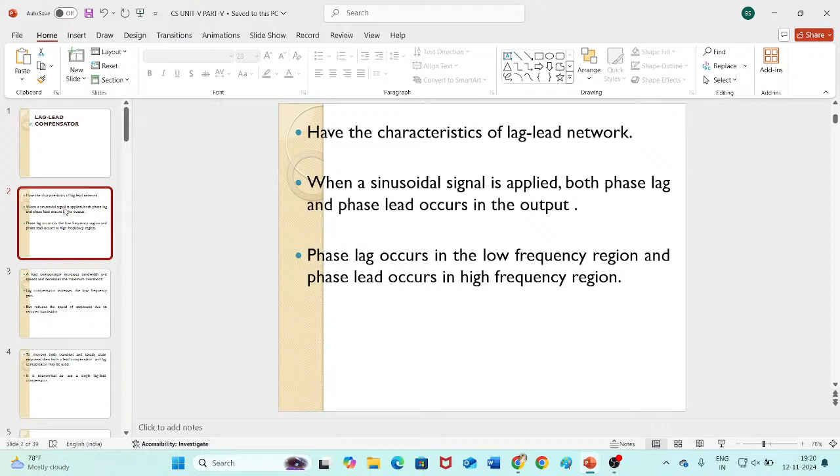In a lag lead network, when a sinusoidal signal is applied as input, both phase lag as well as phase lead occur in the output, but at different frequency regions. So in a lag lead network, if you give a sinusoidal supply, both phase lag and phase lead will occur in the output at different frequency regions. Phase lag occurs usually at low frequency region, and phase lead occurs at high frequency region.

The phase angles will vary from lag to lead as frequency is increasing from 0 to infinity. Why? Because phase lag is occurring at low frequency region and phase lead is occurring at high frequency region. Therefore, phase angle omega will vary from lag to lead as frequency is increased from 0 to infinity.

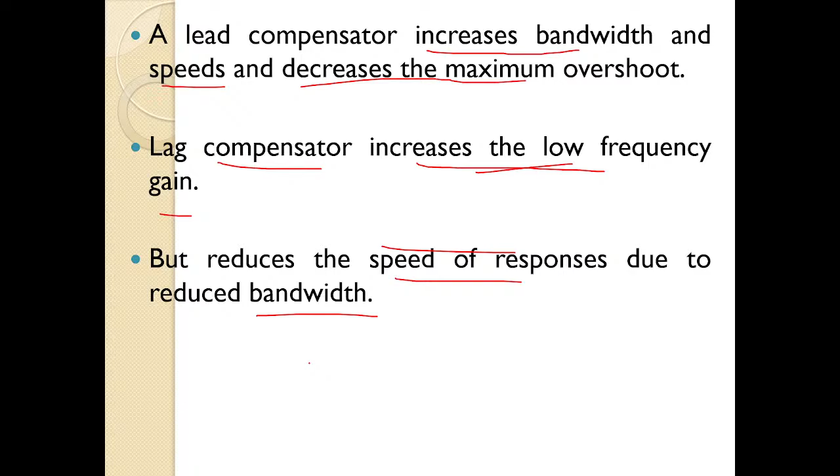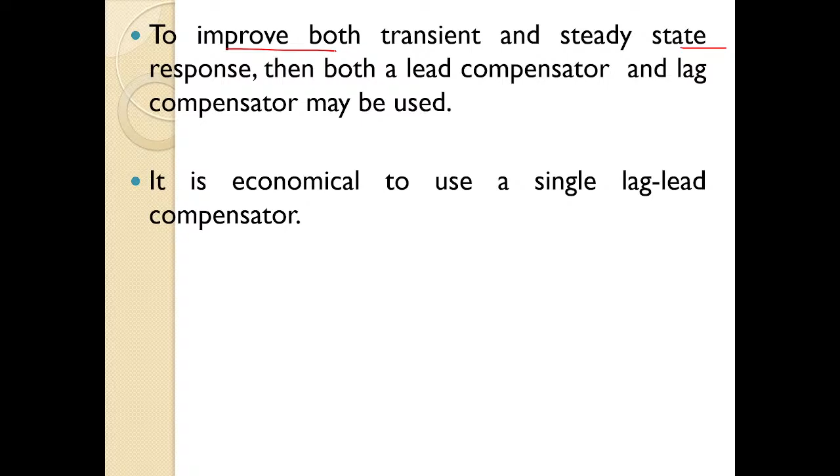Now, if you want to improve both transient as well as steady state response, then we need both lead compensator as well as lag compensator. So to improve the transient response as well as steady state response, we require both lead compensator as well as lag compensator simultaneously.

Since we require both lead compensator and lag compensator simultaneously, instead of using them separately, we can combine those two together to form a compensator which is known as lag lead compensator. Because of these advantages of lag compensator and lead compensator, they are combined together and operated as a single compensator.

In order to combine their characteristics, both the transient response as well as steady state response will increase when we are using both lag compensator and lead compensator. So instead of using separate lag compensator and lead compensator, we can use a single compensator known as lag lead compensator, which has all the advantages of both lag and lead compensators.

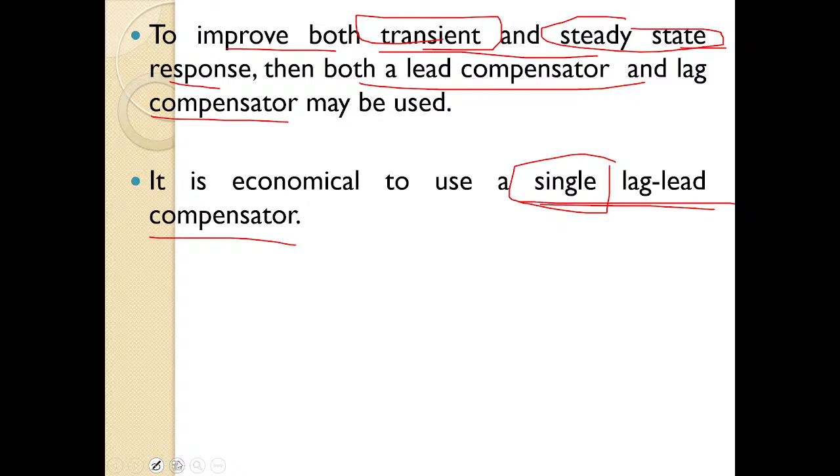Now, let us see the S-plane representation of lag lead compensator.

This lag lead compensator possesses two poles and two zeros such that compensation will increase the order of the system by two. When you provide compensation to any system, the order of the system will increase by two, unless the poles and zeros cancel each other. If they cancel, then the order will not increase by two. But if they are not cancelling, since the compensator has two poles and two zeros, the order of the system will increase by two.

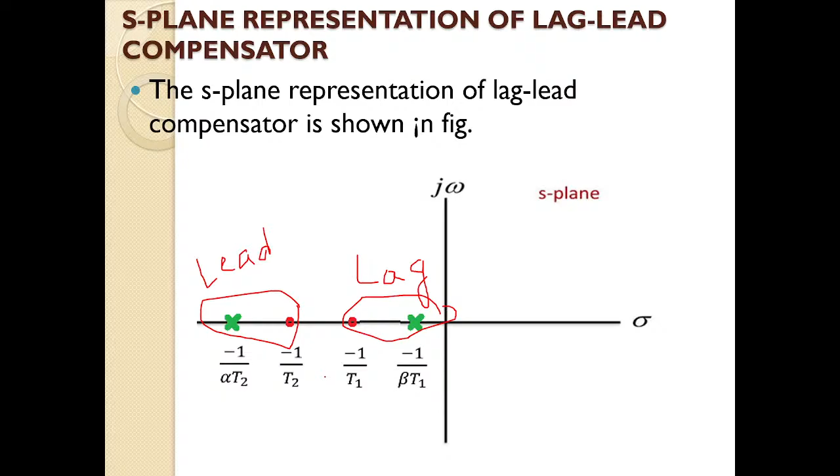So the transfer function of lag lead compensator is given by GC of S equals S plus 1 by T1 into S plus 1 by T2, divided by S plus 1 by beta T1 into S plus 1 by alpha T2, where beta is greater than 1 and alpha lies between 0 and 1. This is the transfer function of the lag lead compensator, which has two poles and two zeros on the LHS side of your S plane.

So let us realize this lag lead compensator. Next, realization of lag lead compensator using the electrical method. So let us realize this lag lead compensator using the electrical network.

So you can see here, it is an RC network. Input is EI of S and output is E naught of S. On the series branch, there is a parallel combination of R1 and C1 capacitor, and on the parallel branch, these two elements R2 and 1 by SC2 are connected in series.

So we have written these capacitance values in Laplace form. Input and output, as well as current, is also in Laplace form. So this is a Laplace circuit. To this circuit, if we apply voltage division rule...

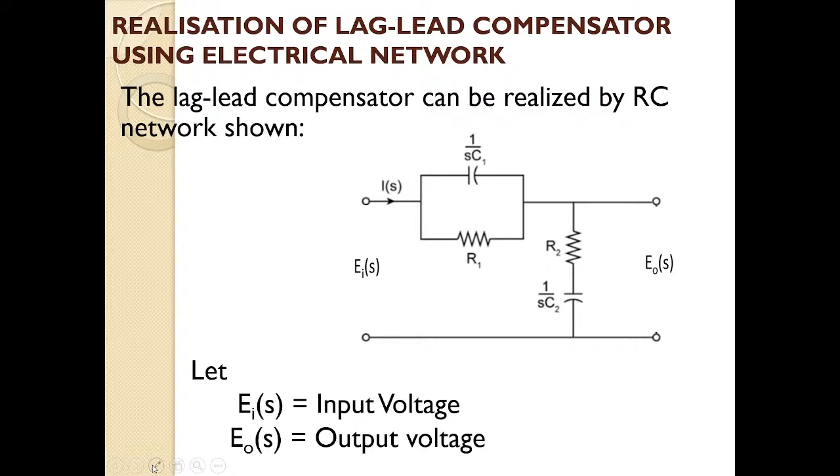What is our output voltage? Output voltage is equal to input voltage into the self impedance, by opposite impedance plus self impedance. That is the voltage division rule formula.

So let us see. What is our output voltage? That is the input voltage equal to R2 plus 1 by SC2, divided by R1 parallel with 1 by SC1, plus R2 plus 1 by SC2. R2 and 1 by SC2 are connected in series, and R1 and 1 by SC1 are connected in parallel.

So just simplify it, you will get E naught of S by EI of S equal to S into R2 C2 plus 1 by SC2, divided by R1 into 1 by SC1 by R1 plus 1 by SC1, plus S into R2 C2 plus 1 by SC2. This is a very familiar voltage division rule, simple circuit.

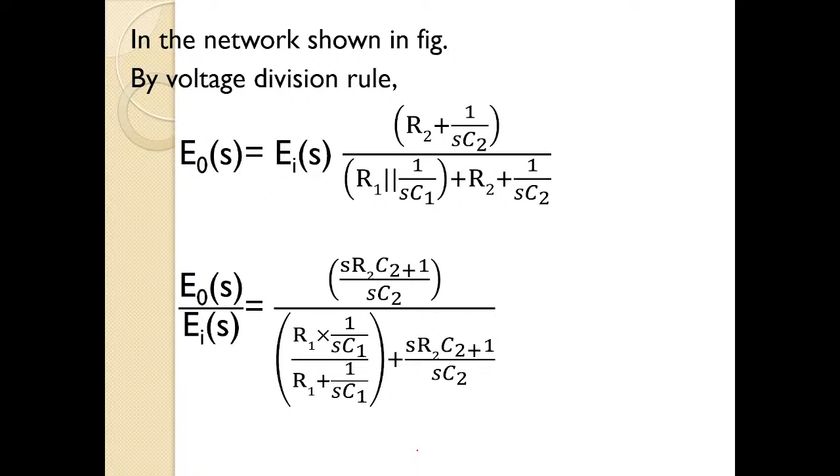RC circuit is there, so simply you have to write the equations, which you can easily write down. It's very easy to write. Simple circuit, nothing complicated. So just rearrange the terms.

If we rearrange the terms, you will get E naught of S by EI of S is equal to SR2C2 plus 1 by SC2, all divided by R1 by SR1C1 plus 1, plus SR2C2 plus 1 by SC2.

Just take the common denominator in the denominator term. If we take the common denominator of this term, you get E naught of S by EI of S equals SR2C2 plus 1 by SC2, divided by SR1C2 plus SR1C1 plus 1 into SR2C2 plus 1, all divided by SR1C1 plus 1 times SC2.

So send this denominator to the numerator term, just rearrange the terms, you will get E naught of S by EI of S equals SR1C1 plus 1 into SR2C2 plus 1, by SR1C2 plus SR1C1 plus 1 into SR2C2 plus 1.

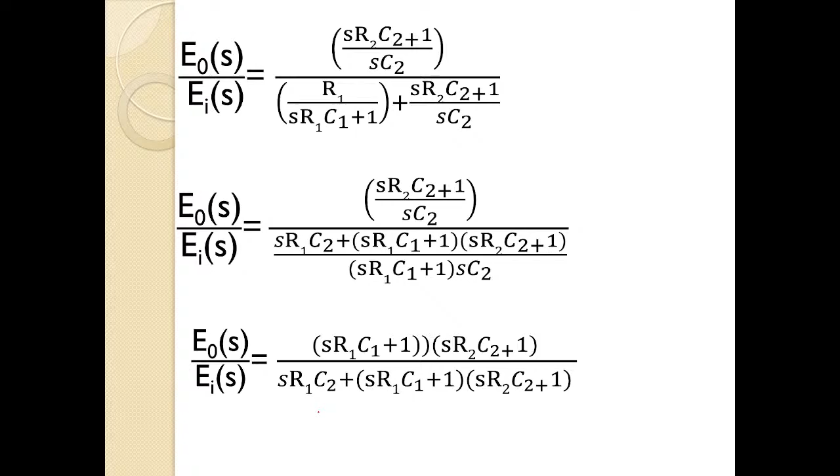I'm simply reading the equations. Being an engineer, you know how to simplify these terms and how to rearrange them. It's simple. So once again, if I rearrange the terms, if I take some terms common, what do I get?

R1C1R2C2 into S plus 1 by R1C1, into S plus 1 by R2C2, by SR1C2 plus R1C1R2C2 into S plus 1 by R1C1, into S plus 1 by R2C2. Now, on dividing the numerator and denominator by R1C1R2C2, you will get...

E naught of S by E i of S is equal to S plus 1 by R1C1 into S plus 1 by R2C2, all divided by S by R2C1 plus S plus 1 by R1C1 into S plus 1 by R2C2.

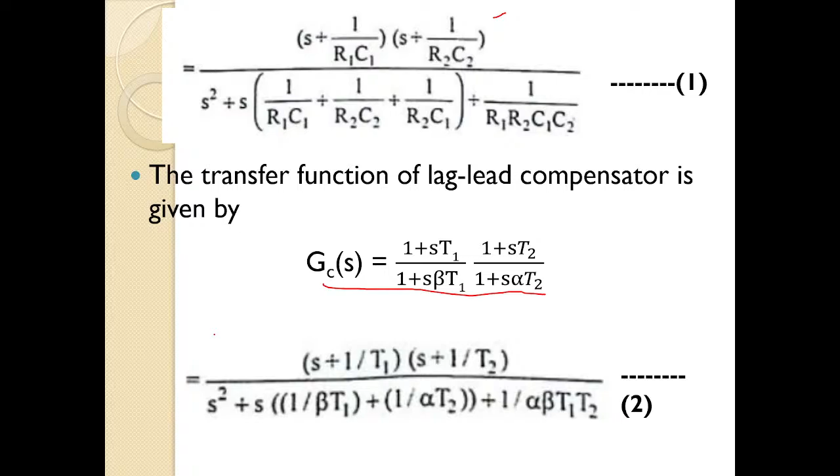Just compare this transfer function with the above equation. By comparing, what you get is T1 is equal to R1C1, T2 is equal to R2C2, and R1R2C1C2 is equal to alpha beta T1T2, and 1 by R1C1 plus 1 by R2C2 plus 1 by R2C1 is equal to 1 by beta T1 plus 1 by alpha T2. Simply by comparison you will get these terms.

So from this equation 5 - okay, this is our equation 5 - what is it? R1R2C1C2 is equal to alpha beta T1T2. So from this, you can determine alpha beta. Alpha beta is equal to R1R2C1C2 by T1T2.

Okay, just rearrange the terms and you will get this. I think I have written in the reverse direction. Okay, wonderful.

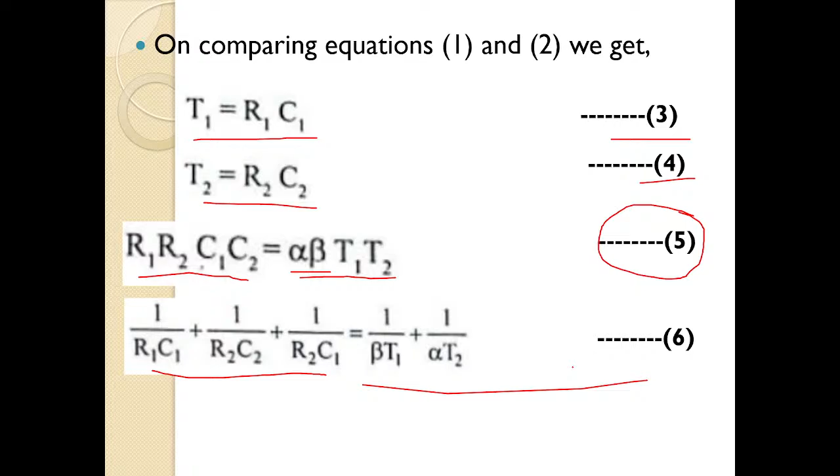So from the above equations 3, 4, and this equation 7 - okay, from all these equations, if you compare them, you will get alpha into beta is equal to 1. Okay, alpha beta is equal to 1. Now, alpha beta is equal to 1 means what is alpha? Okay, alpha is... one second.

So alpha and beta are the attenuation and gain and the amplifier values. So if you don't want them, you can simply cancel them. Okay.

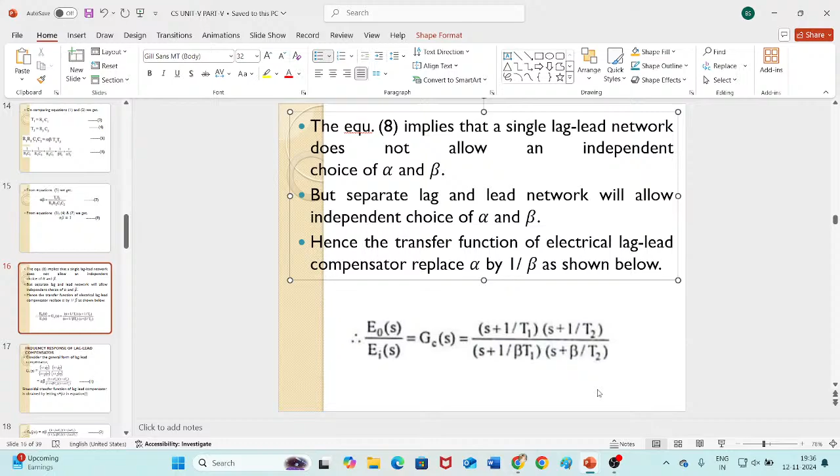So by looking at this above equation, alpha beta is equal to 1, what we can say is that alpha beta are not allowed as independent choice. But if we take separate lag and separate lead network, then you can independently choose alpha and beta. But when you combine lag and lead compensator, when you are considering lag-lead compensator, alpha beta cannot be considered independently.

Okay. So the transfer function of the electrical lag-lead compensator - you can replace alpha by 1 by beta, as shown below. So wherever alpha was there, I have replaced it by 1 by beta. Okay, so this is it. This is the transfer function for the electrical system.

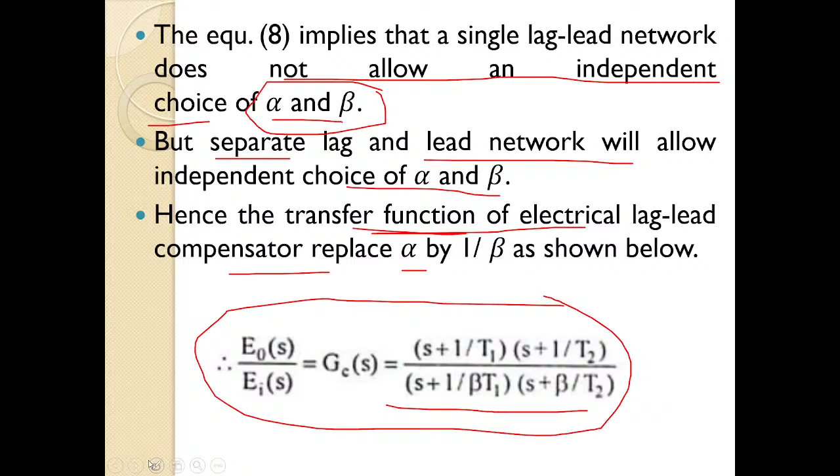Now let us go to the frequency response of lag-lead compensator. So what is our compensator transfer function? S plus 1 by T1 into S plus 1 by T2, by S plus 1 by beta T1 into S plus 1 by alpha T2, is our lag-lead compensator transfer function. You just simplify, you will get alpha beta into 1 plus ST1 into 1 plus ST2 by 1 plus S beta T1 into 1 plus S alpha T2. This is the transfer function of lag-lead compensator.

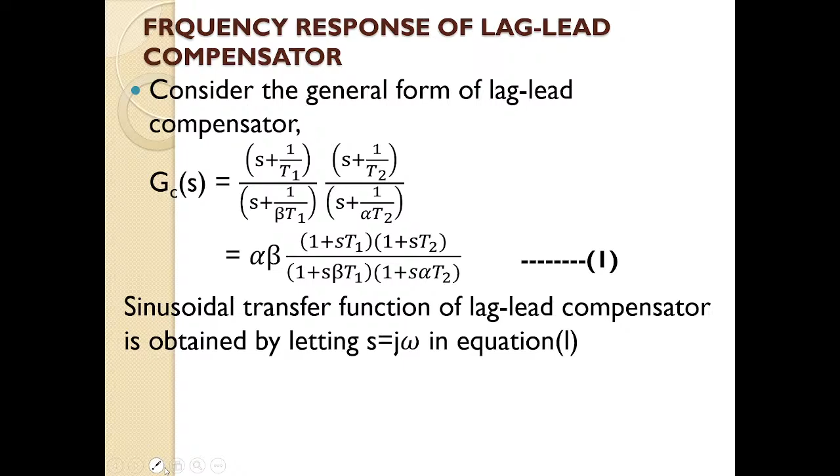Now we want the frequency response, isn't it? We want the frequency response of this lag-lead compensator. So since we want the frequency response, replace S by j omega. If we replace S by j omega, you will get GC of j omega equal to alpha beta into 1 plus j omega T1 into 1 plus j omega T2, by 1 plus j omega beta T1 into 1 plus j omega alpha T2.

Okay, so now if I don't want alpha and beta, if alpha beta value is 1, okay - so we know one is the attenuation, one is the amplifier value. So simply multiply it with 1 by alpha beta, and alpha beta will be cancelled. So let us assume alpha beta is 1. Then, okay, so if alpha beta is equal to 1, then what will happen to the transfer function?

Transfer function will be GC of j omega equal to 1 plus j omega T1 into 1 plus j omega T2, by 1 plus j omega beta T1 into 1 plus j omega alpha T2.

Here we have four factors in GC of j omega. What are those factors? Two first order numerator factors, and two first order denominator factors. Total four factors are there.

So we can get four corner frequencies: omega C1, omega C2, omega C3, and omega C4. Always omega C1 will be less than omega C2, omega C2 will be less than omega C3, and omega C3 will be less than omega C4.

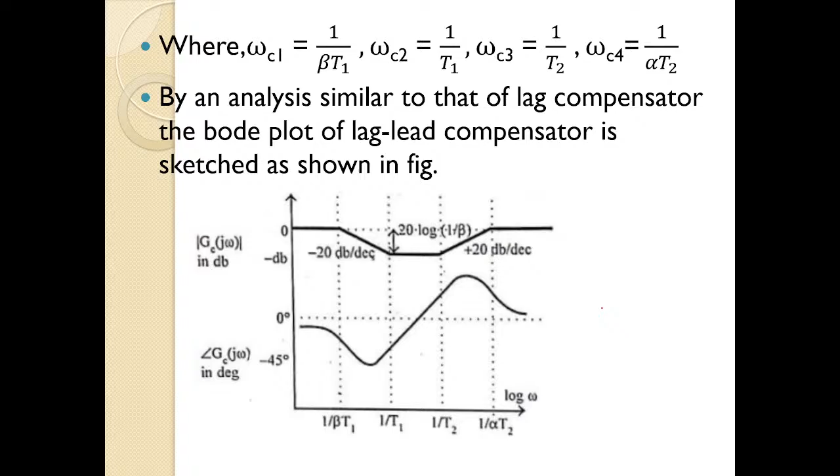Now let us solve some numerical problems. Not some, we will solve one numerical problem on this.

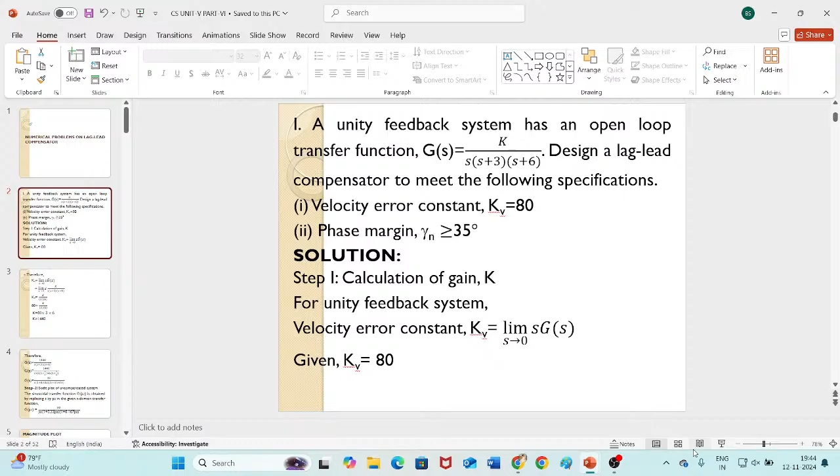So let us start. Write down the problem while I am explaining it. A unity feedback system has an open loop transfer function. Unity feedback system means H of S, the feedback gain, is equal to 1.

So forward path gain G of S is given, that is K by S into S plus 3 into S plus 6. This is the forward path gain. Design a lag lead compensator to meet the following specifications: velocity error constant Kv equal to 80, and phase margin gamma n greater than or equal to 35 degrees. Just write down the problem within a minute.

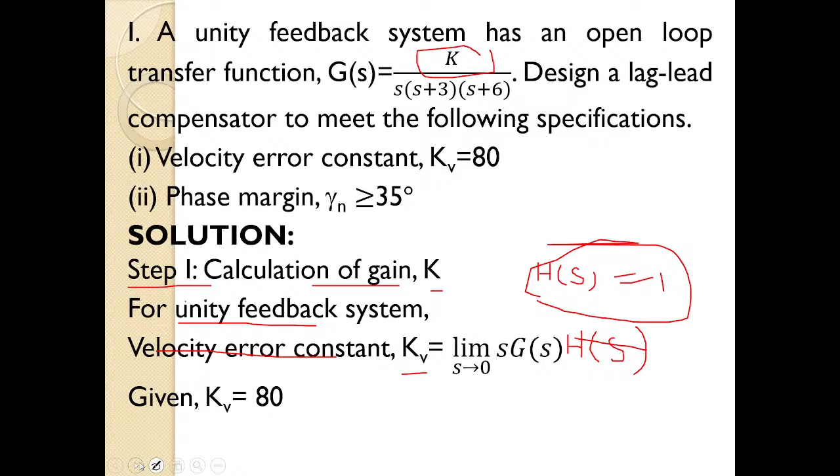H of S is equal to 1. And we already know the formula: velocity error constant Kv is equal to limit S tends to 0, S G of S H of S. This is the formula. But since it is a unity feedback system, H of S is equal to 1, so no need to write H of S. So Kv equal to limit S tends to 0, S G of S.

And in the question itself, they have given the velocity error constant. It should be equal to 80. Kv is 80.

Let us proceed further. Now Kv is equal to limit S tends to 0, S G of S. What is G of S? K by S into S plus 3 into S plus 6. Here already S is there, so this S and this S will cancel.

Now substitute the limit. If we substitute the limit, this S will become 0 and this S will also become 0. After this, numerator S and denominator S cancel, substitute the limit, both the S will become 0. What is left over? K, 3 and 6.

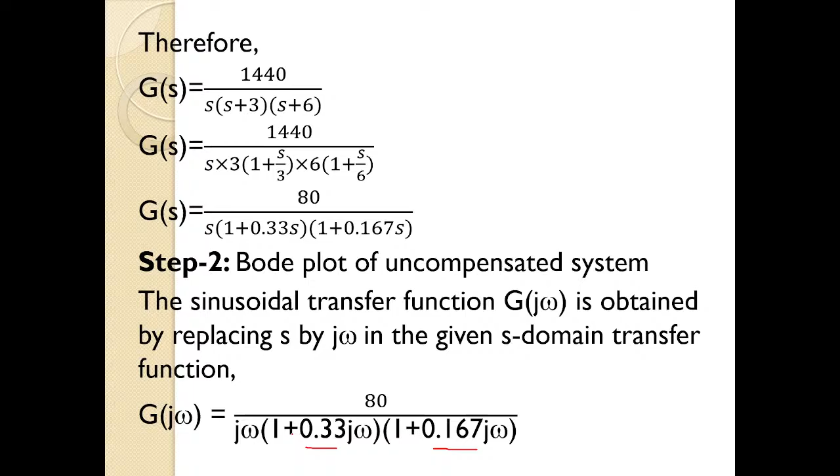So let us go for the magnitude plot. Omega c formula is 1 by T. So omega c1 equal to 1 by T, what is our T value here? 0.33 for one, another T value is 0.167. So first corner frequency is 1 by 0.33, another corner frequency is 1 by 0.167. Simplify it: omega c1 is 3 radians per second and omega c2 is 6 radians per second.

Okay, so now let us draw this table. Write down all the basic factors. You have one integral factor, one first order denominator factor, and one more first order denominator factor. Write all three factors in the first column.

Now write down the corner frequencies of these factors. The integral factor will not have any corner frequency. For this first order denominator factor, corner frequency we have already calculated: Omega c1 equal to 1 by t. What is t here? 0.33 is our t. So 1 by 0.33 we get 3 radians per second.

Here we have two corner frequencies. Therefore, omega L should be chosen less than omega C1, and omega H should be chosen greater than omega C2. Here you can see omega C1 is 3, omega C2 is 6, so omega C1 is less than omega C2. So omega L should be less than omega C1, and omega H should be greater than omega C2.

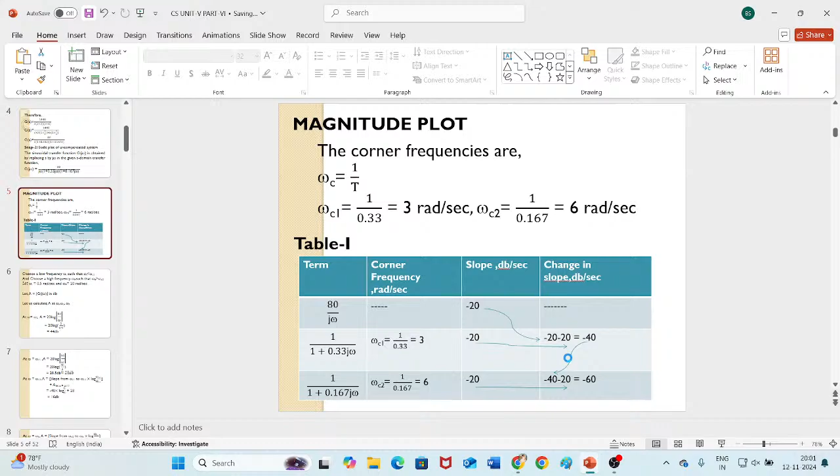So let us choose omega L as some value less than omega C1. Omega C1 was 3, so omega L I have chosen 0.5, which is less than 3. Omega C2 was 6, so omega H I have chosen 20 radians per second, which is greater than omega C2. Write it down.

So in total, how many frequency values do we have? We have omega L value, we have omega H value, we have omega C1 value, we have omega C2 value. Total 4 frequencies are there: omega L, omega C1, omega C2, and omega H.

For all these omega values, let us determine the magnitude A, in decibels. A is the magnitude of G of j omega in decibels, denoted by A. So let us determine A. Here I didn't change this.

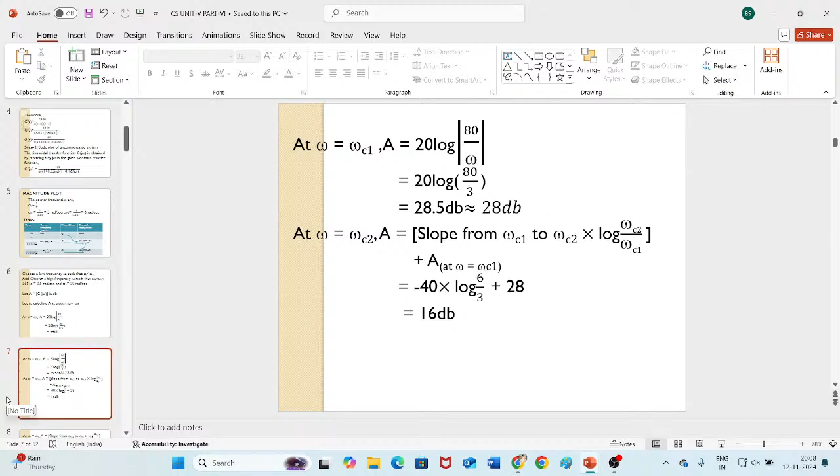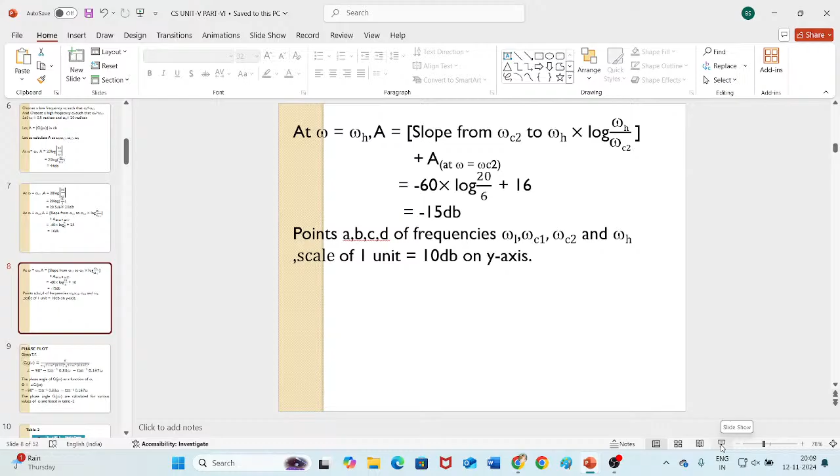Okay, then let us consider omega equal to omega h. Omega h value, what did we assume? 20. Now, what is the slope from omega C2?

So the formula to determine A value is A equal to slope from omega C2 to omega H into log of omega H by omega C2 plus A at omega equal to omega C2. So now let us see what is the slope from omega C2 to omega H.

Omega C2 to omega H. So what is our slope in this table? In this table, this is our omega C2. What is the slope? Minus 60. So omega H is greater than omega C2, so this minus 60 will go to omega H. So slope from omega C2 to omega H is minus 60.

That's what I have written here: minus 60 into log of omega H value 20 by omega C2 is 6, plus 16. What is this 16? It is A at omega equal to omega C2. So A at omega equal to omega C2, what is the A value? A value is 16 decibels. So write down that and just solve it, you will get minus 15 decibels.

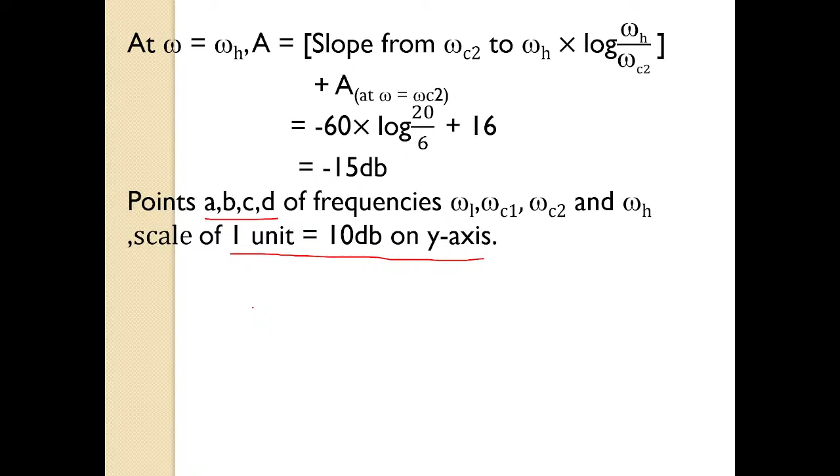A, B, C, D on semilog graph, assume 1 unit equal to 10 decibels on y-axis. Okay, consider 1 unit equal to 10 decibels on y-axis. So let us go to the magnitude plot. So this is it, this is my plot.

So I have considered this point on the x-axis: 0.01. I have not written here, but this point is 0.01, this is 0.1, this is 1, this is 10. Omega in radians per second on x-axis. And what about y-axis, A in decibels? I have considered 10 decibel y-axis. Okay, there is my cursor.

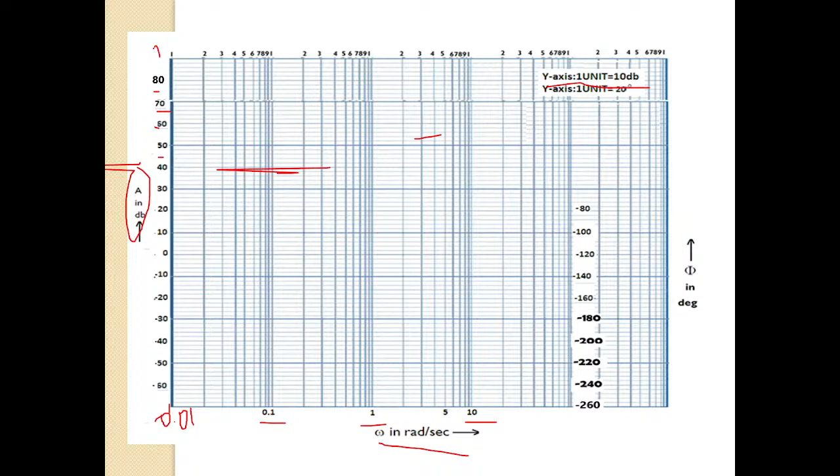Y-axis: 1 unit equals 10 decibels. So I have started with 80, 70, 60, 50, and so on. I left some space here, but you can start writing 80 from here. Okay, 80, 70, 60, and so on, up to minus 60. This is my minus 60, and this is my 80. So just take the scale on the graph sheet for the y-axis.

X-axis: this is 0.01, this is 0.1, 1, and 10 radians per second. Omega value on x-axis, and A on y-axis.

Take the scale on the graph, on a semilog graph sheet. I hope you have completed that. Now locate the points on the graph sheet. So what are my points?

What are my points when omega equals omega L? What is my omega L value? 0.5. So where is my cursor or pointer? This is it. So for 0.5, where is 0.5 here? This is my 0.5, isn't it? So this is the 0.5 omega value on the x-axis. For 0.5, I can write here 0.5.

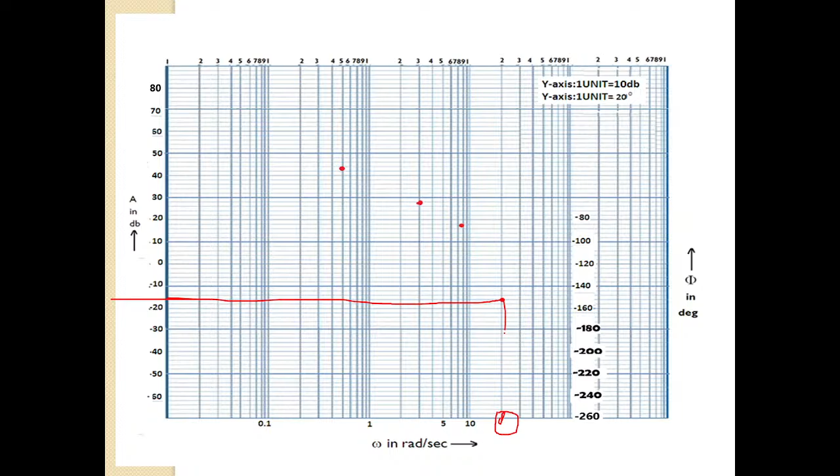I'm able to write 20. This is 20 radians per second. Omega value is 20 here. This point is 20, and for omega 20, the value is minus 15. So this is minus 15. Okay, this is our point.

So these are the points for the magnitude plot. Just join them, and you will get this plot. And you can even write the slopes. So the slope from the first point to the second point, what is this change of slope from one point to another point, from the table A - the magnitude plot table - you can write down the slopes above this, noting the change in slope values. Okay, this is our magnitude plot.

Now let us go to the phase plot. Let us go to the phase plot.

So what is our sinusoidal transfer function G of j omega? You can rewrite it in magnitude and phase angle form. The magnitude is k by omega times root of 1 plus omega squared into 0.33 squared, times root of 1 plus omega squared into 0.167 squared. The angle is minus 90 for the integral factor, and for the first order denominator factor, the angle is minus tan inverse of 0.33 omega. For another first order denominator factor, the phase angle is minus tan inverse of 0.167 omega.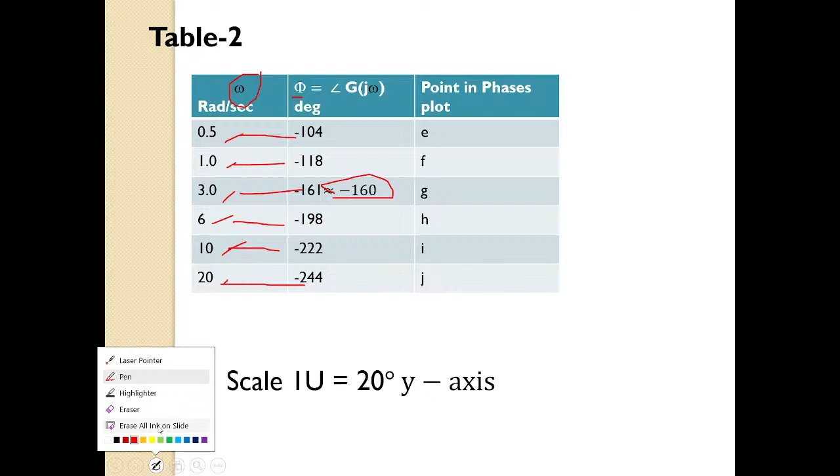So these are the phi values and omega values. You can give some notations to them on the graph, like E, F, G, H, I, J, for each and every point on the graph.

Just write down this table. I have assumed one unit equal to 20 degrees on the y-axis.

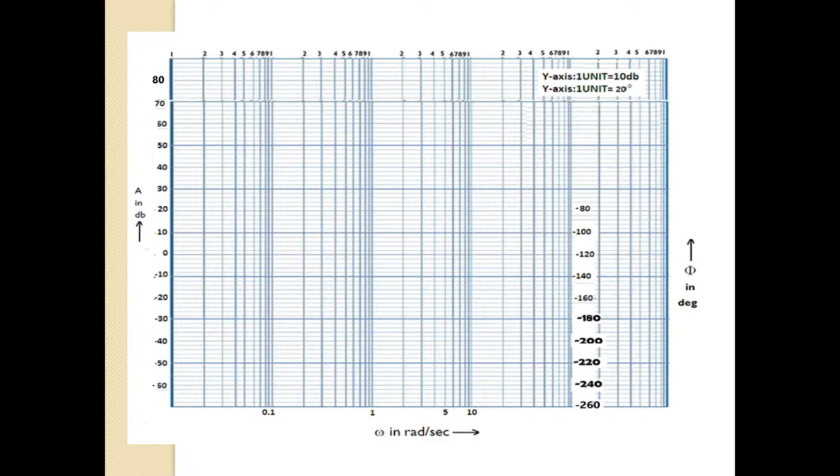So I hope you have written the omega and phase values. Now just locate the points, the five phase values for each omega value on the graph. So these are the points.

For 0.5 radians, this is 0.2, 0.3, 0.4, 0.5 on the scale. So this is 0.5 for omega equal to 0.5. What is the angle? Minus 104.

So you can see here, this is my scale. I have considered from minus 260 to minus 80, with 20 degree difference, 1 unit equal to 20. No need to write it twice, I made that mistake here, just write it one time, that is more than sufficient.

So minus 104, look at this point. Next point is for omega equal to 1. For omega equal to 1, angle is minus 118 degrees. That's the phase angle, minus 118 degrees.

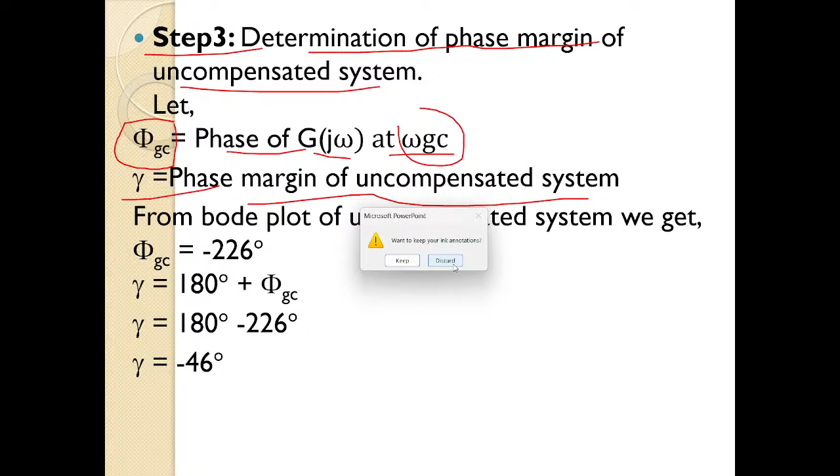So if we know omega gc, we can determine phi gc. Omega gc we already know, it is obtained at 0 decibels. When A is 0, you can determine the omega gc.

So omega gc is obtained at A equal to 0. Let us go to the graph. You can see A value is 0 here. From here, draw a dotted line towards the magnitude plot. It intersects the magnitude plot here. From here, draw a vertical line towards the x-axis, and wherever it intersects the x-axis, that is our omega gc.

While traveling from this magnitude plot towards the x-axis, this dotted line cuts the phase plot at some point. From there, draw a horizontal line towards the y-axis of your phase, and you will get phi gc equal to minus 226 degrees. Just observe the dotted line here.

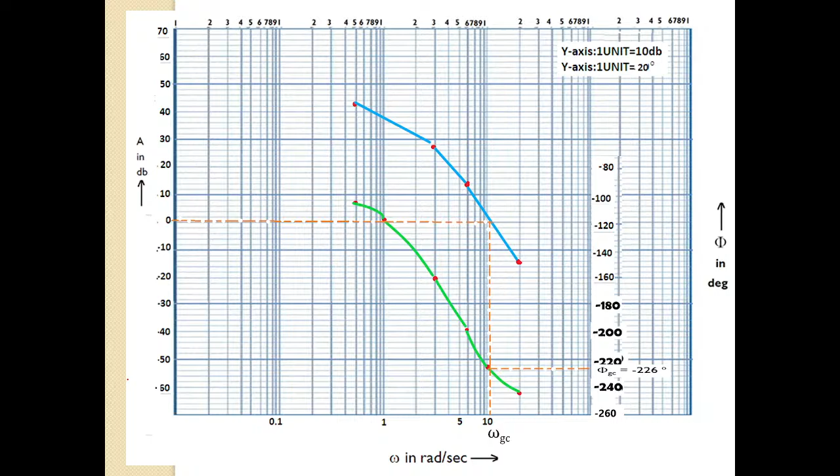Now, let us go back. So what is this phi gc? Phi gc is the phase of G of j omega at omega gc. And what is gamma? It is the phase margin of the uncompensated system.

Now, from the Bode plot, for the uncompensated system, what did we get? Phi gc is minus 226 degrees. What is the gamma formula? Phase margin formula is 180 plus phi gc. So phi gc is minus 226. Substitute in this formula: gamma equal to 180 minus 226. If you simplify 180 minus 226, you will get gamma equal to minus 46 degrees.

Now this is the phase margin for the uncompensated system. This is the phase margin for the uncompensated system.

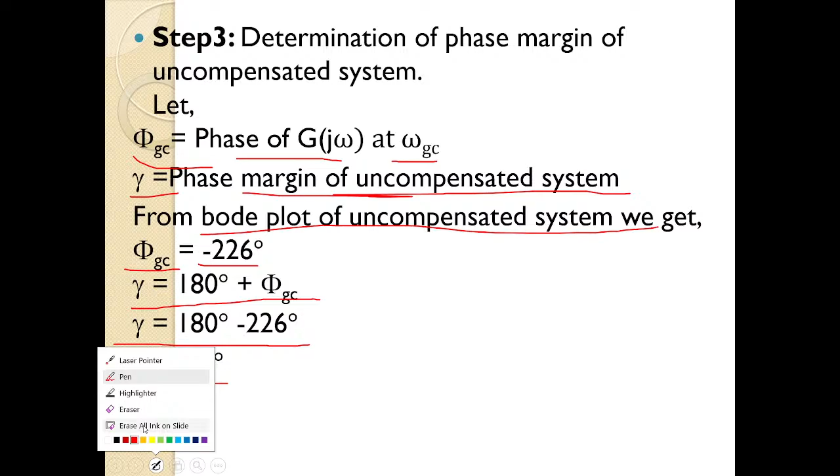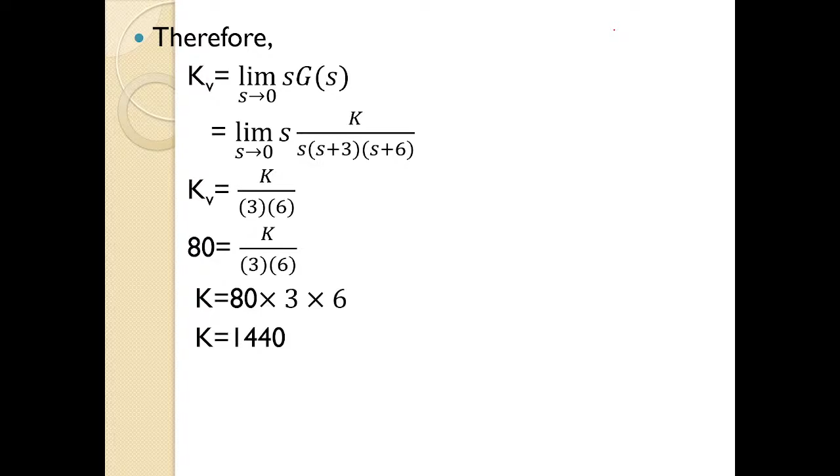If you see your question, in the question that you have already written in your notes, if you see the phase margin that they have asked, let me go back to the question. In the question, they have asked that phase margin should be greater than or equal to 35 degrees. So what is the phase margin that we have got? Minus 46 degrees. So we need a compensator to get the required phase margin.

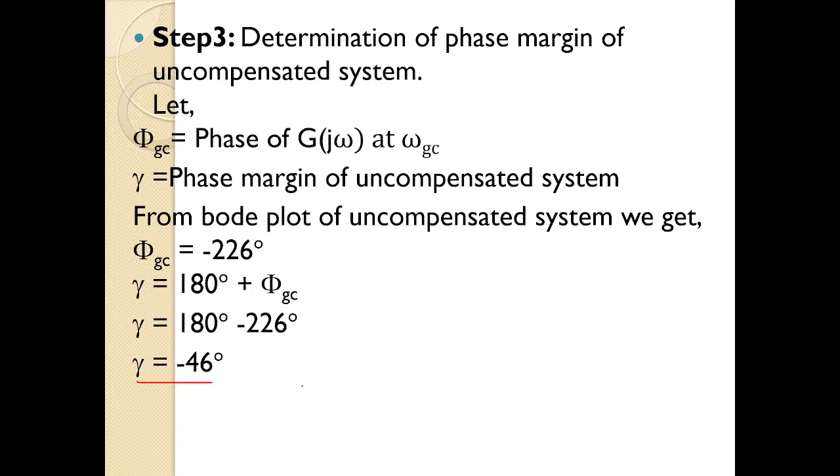So how much phase margin did you get for uncompensated? Minus 46 degrees. But our requirement is greater than or equal to 35 degrees. So we need a compensator. Let us go to the next step.

Step number 4: choose a new phase margin of the compensated system. What is the desired phase margin? In the question they have mentioned desired 35 degrees. So let us assume gamma d is the desired phase margin, that is 35 degrees.

So the new phase margin gamma n of the compensated system is desired phase margin plus initial choice value. Let us assume initial choice value is 5 degrees. Since the gain crossover frequency position will change from its actual position, we need this initial choice value, so let us assume it is 5 degrees.

Desired phase margin is 35 degrees, and we need to determine the new phase margin. New phase margin equals desired phase margin plus epsilon: 35 plus 5. So what is our new phase margin now? 40 degrees. So the new phase margin for the compensated system is 40 degrees. Just write it down.

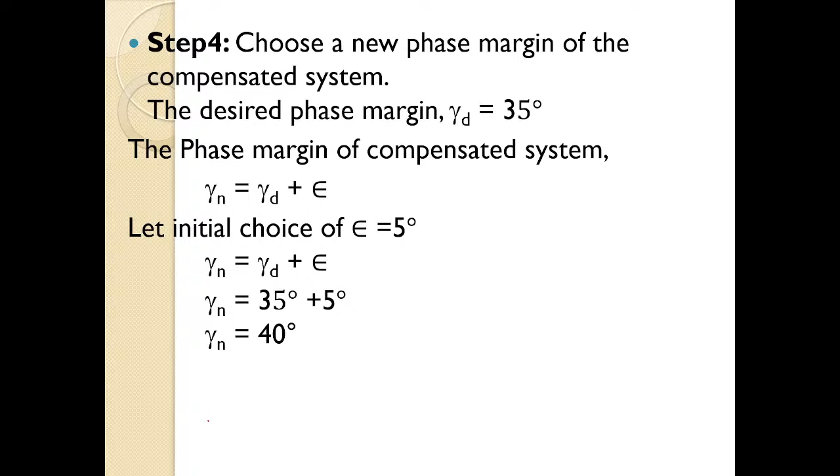I hope you have written it. Now let us go to step 5: determine the new gain crossover frequency.

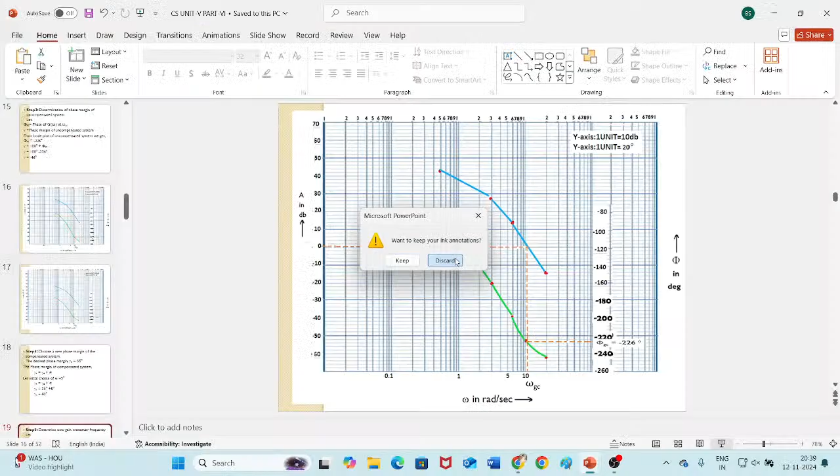Let us assume omega GCN is the new gain crossover frequency, and phi GCN is the phase of G of j omega at omega GCN, written as a subscript. So phase of G of j omega at omega GCN is phi GCN, the new gain crossover frequency.

Now what is our new phase margin? It is 180 plus phi GCN, so gamma is equal to 180 plus phi GCN. So what is phi GCN now? Phi GCN is gamma n minus 180. What is gamma n? Just now we determined in the previous step, that is 40. So phi GCN is equal to 40 minus 180, which is minus 140.

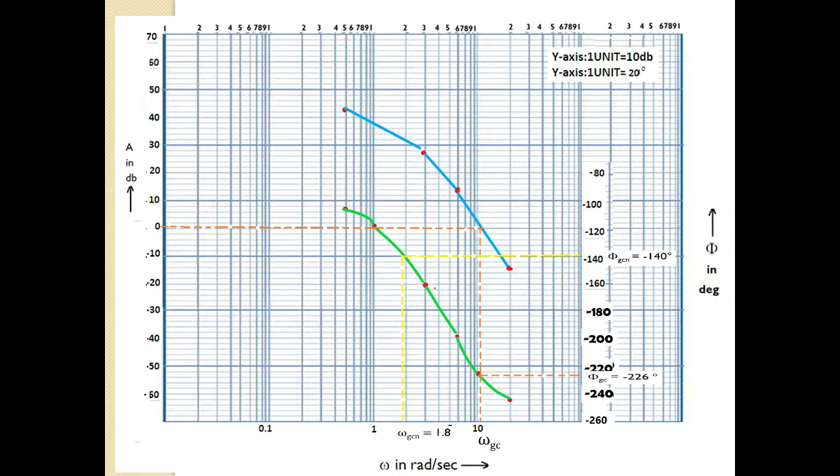So the phase at the new gain crossover frequency is minus 140. Since we have the phase at the new gain crossover frequency, we can determine the new gain crossover frequency omega GCN for this phase. So if you know phi GCN, you can determine omega GCN. Let us go to the Bode plot. So what is phi GCN? We have got minus 140, that is our phi GCN.

I will take phi GCN as minus 140 degrees. From there, draw a dotted line towards the phase plot. Wherever this dotted line intersects the phase plot, from there draw a vertical line towards the x-axis. It will intersect the x-axis at some point, that is omega GCN. So here my omega GCN is 1.8 radians per second.

Phi GCN we have just calculated theoretically, and we got minus 140 degrees. From there, draw a dotted line towards the phase plot. This green color is the phase plot, blue color is the magnitude plot. So wherever it intersects the phase plot, from there draw a vertical line towards the x-axis. Wherever this line intersects the x-axis, that is our omega GCN, which is 1.8.

So locate that omega GCN and phi GCN in the graph quickly. I hope you have located it.

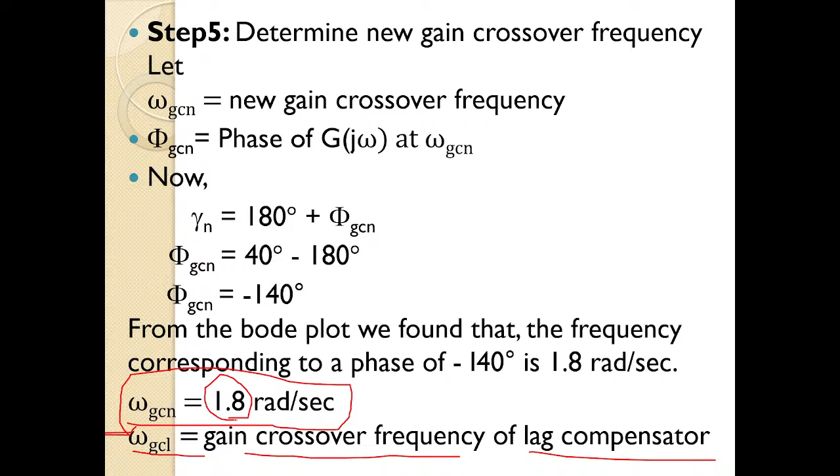Here I have chosen this as our desired value. It is not a specified omega GCL value; you just calculate and get omega GCN from the graph, then choose some value on your own for omega GCL. So omega GCN is 1.8, and I have assumed omega GCL is 4 radians per second. We are not going to calculate omega GCL from anywhere or get it from the graph. We simply determine omega GCN, and we must choose omega GCL such that omega GCL is greater than omega GCN.

Now let's go to step number 6: determine the beta parameter of the lag compensator.

So from the Bode plot, let us determine the dB value, meaning the magnitude A value for omega GCL. Omega GCL, what did we assume? We have assumed some value greater than omega GCN, which is 1.8 from the graph. So omega GCL is 4 radians. For this omega GCL, what is the A value? Let us determine it. So what is my omega GCL? This is it, omega GCL is 4.

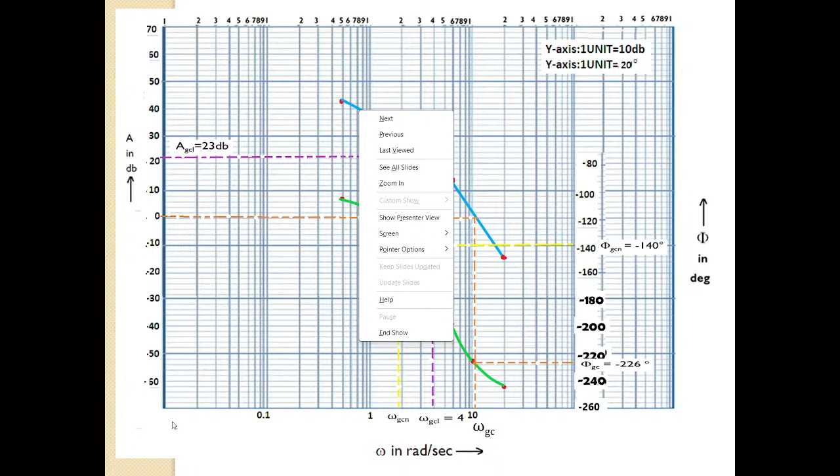Okay then. So AGCL is 23 decibels. Omega GCL is 4.

So let us go back to our step number 6. For omega GCL of 4, what is the A value in dB magnitude? It is 23. So AGCL is 23 decibels.

So the formula to determine beta is AGCL equal to 20 log beta. AGCL by 20 is equal to log beta, and beta is equal to 10 to the power of 23 by 20. AGCL value is 23, so beta equals 10 to the power of 23 by 20. Just solve it, from this determine beta. Beta value I have got 14. Write it down, beta value is 14.

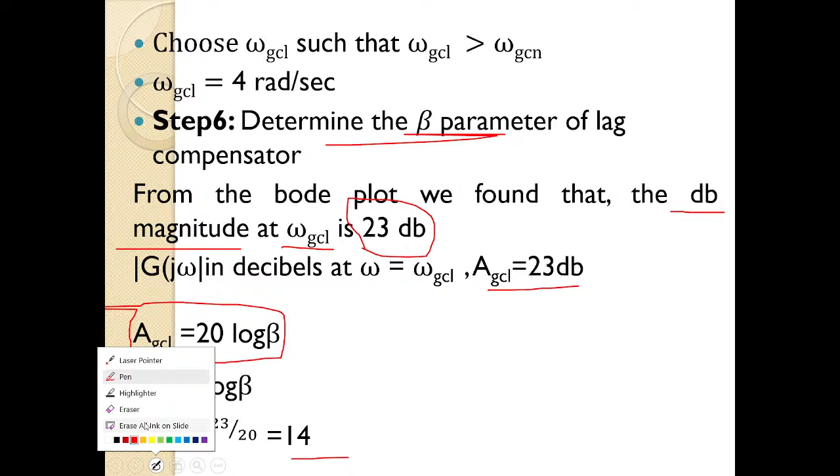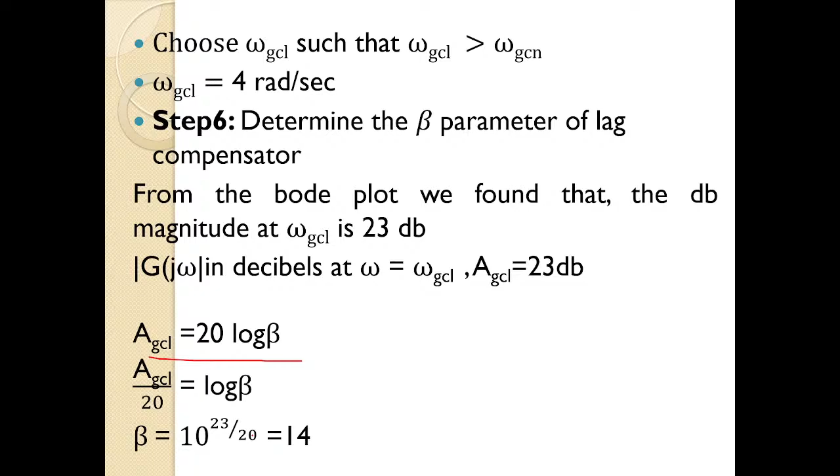So whatever equations are there, you can directly simplify. AGCL equal to 20 log beta, determine beta, you will get 14. I hope you have written it.

Now let's go to the next step, step number 7. Determine the transfer function of lag compensator. Always remember the zero of the lag compensator will be placed at a frequency 1/10 of omega GCL.

We already know the formula for the lag compensator zero, it is 1 by T. So ZC1 equal to 1 by T1, that's equal to omega GCL by 10. From this you just simplify and determine T1 value. T1 value you will get 2.5.

So the pole of the lag compensator formula is PC equal to 1 by beta T. So PC1 equal to 1 by beta T1. Beta value we just calculated in the previous step, that is 14. T1 value is 2.5. Simplify it, you will get PC1 equal to 1 by 35. Just solve it and write it down quickly.

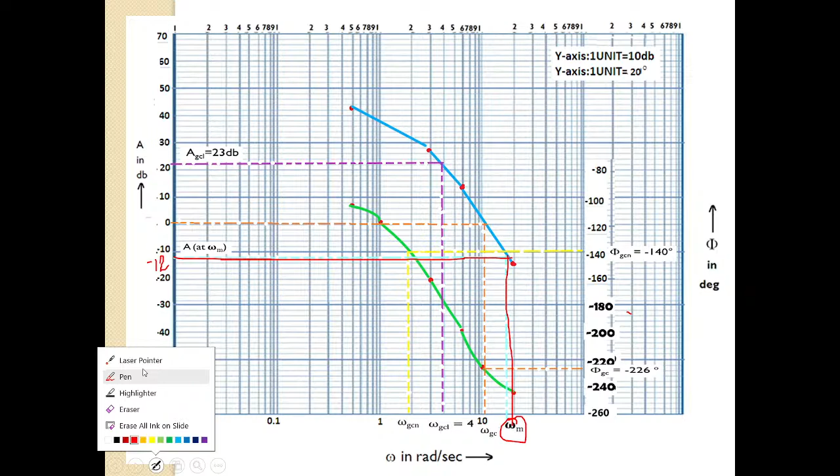So write down the omega m value from the graph. So omega m value is, this is 10, this is 20, so it is nearby to 20, approximately 17 or 18 radians per second. So look at this on the graph, minus 12, this is minus 12.

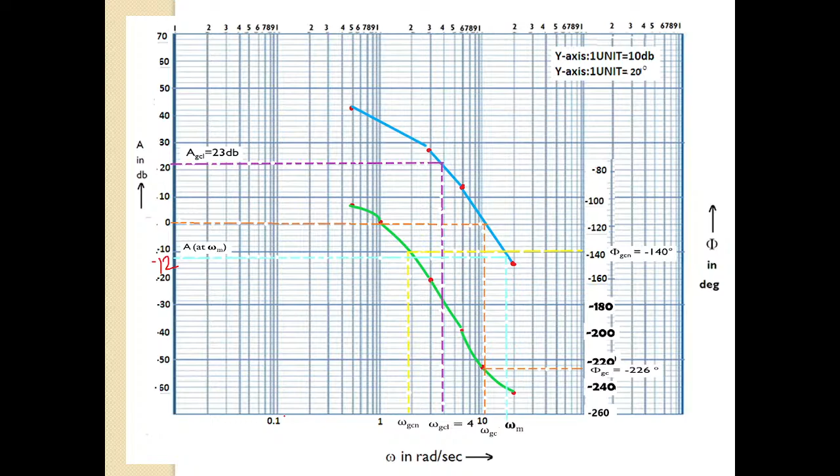Light blue color line, this light blue dotted line, you just carefully observe. From this we can determine the omega m value. So for uncompensated system, that is it, omega m. I have got 17 radians per second. Omega m is 17 radians per second.

So now what is T2? Formula for T2 is 1 by omega m root alpha. Omega m we have got from the graph, that is 17, and alpha is 0.07. You will get the T2 value.

So for the transfer function of your lead compensator, T2 we have got 0.22, and alpha value is 0.07. Substitute that in G2 of s. This is the transfer function of lead compensator, alpha into 1 plus s T2 by 1 plus s alpha T2. Just substitute the values here.

The formula, you will get G2 of s is equal to 0.07, 1 plus 0.22 s by 1 plus 0.0154. Write it down quickly.

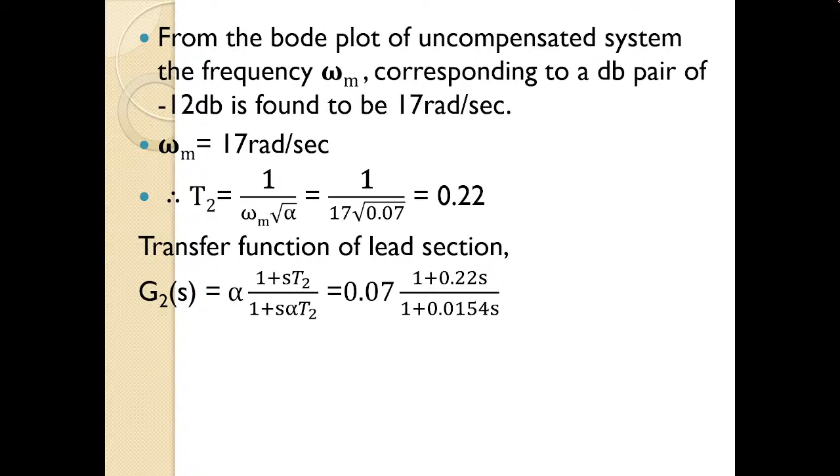Okay, so I'll proceed, it's already late. Now step number 9: determine the transfer function of lag lead compensator.

So transfer function of lag lead compensator, Gc of s is equal to G1 of s into G2 of s. Just now we have determined G1 of s and G2 of s. So G1 of s is beta into 1 plus s t1 by 1 plus s beta t1, and G2 of s is alpha into 1 plus s t2 by 1 plus s alpha t2.

So just write down whatever you have got earlier. So for G1 of s, Gc of s is 14 into 1 plus 2.5s by 1 plus 35s into 0.07, 1 plus 0.22s by 1 plus 0.0154s.

So just solve it, you will get Gc of s is equal to 1 plus 2.5s into 1 plus 0.22s whole divided by 1 plus 35s into 1 plus 0.0154s. So write it down as quickly as possible. I will conclude. Okay, so this is the transfer function, compensator transfer function, when both lag and lead compensators together they are operating.

So now in step number 10 we can determine the open loop transfer function for the compensated system. So we have got a transfer function for the compensator, this is Gc of s.

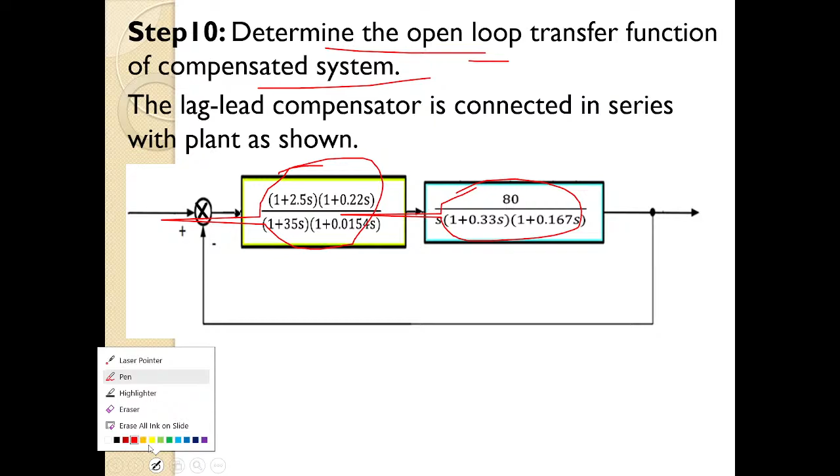So now we have connected the compensator to the open loop here. Therefore, we can call this system the compensated system. So the open loop transfer function for the compensated system, let us assume it as G naught of S. So G naught of S is equal to Gc of S into G of S.

What is Gc of S? It is there in the above diagram, and this is our G of S. Just simplify it and you will get G naught of S, the compensated system transfer function: G naught of S equals 80 into 1 plus 2.5s into 1 plus 0.22s, divided by s into 1 plus 35s into 1 plus 0.0154s into 1 plus 0.33s into 1 plus 0.167s. So I would ask you to write it down.

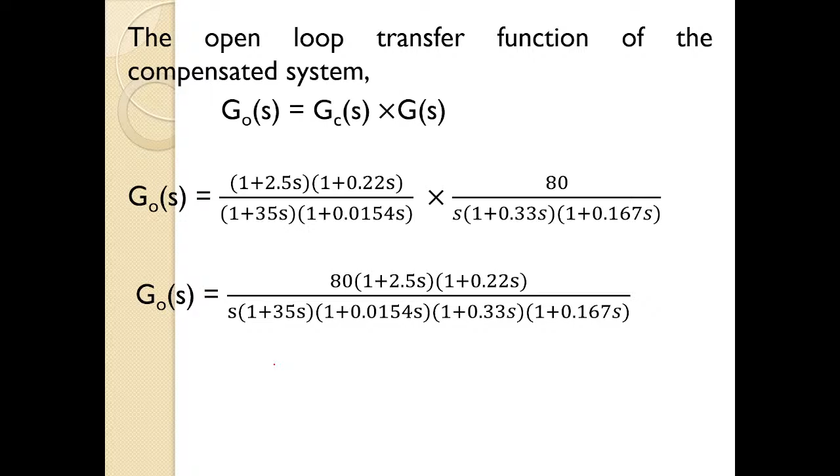So this is our open loop transfer function now. For this transfer function, you can determine the sinusoidal form of this transfer function, and you can plot the Bode plot for this compensated system. This is our compensated system transfer function. So for this, go to step number 11.

Next step, Bode plot of the compensated system. What we have to do is replace S by J omega in the above equation. You will get: G naught of J omega equals 80 into 1 plus 2.5 j omega into 1 plus 0.22 j omega, divided by j omega into 1 plus 35 j omega into 1 plus 0.0154 j omega into 1 plus 0.33 j omega into 1 plus 0.167 j omega. This is what you will get.

This is the sinusoidal transfer function. So if you know the sinusoidal transfer function, you can go for the magnitude plot. Magnitude plot. How many corner frequencies can we determine?

How many factors are there? One integral factor is there. First order numerator factors: two first order numerator factors are there. And first order denominator factors: total 1, 2, 3, and 4. So one integral factor, two first order numerator factors, and four first order denominator factors are there. So how many corner frequencies do you get? 4 plus 2, total 6 corner frequencies you will get.

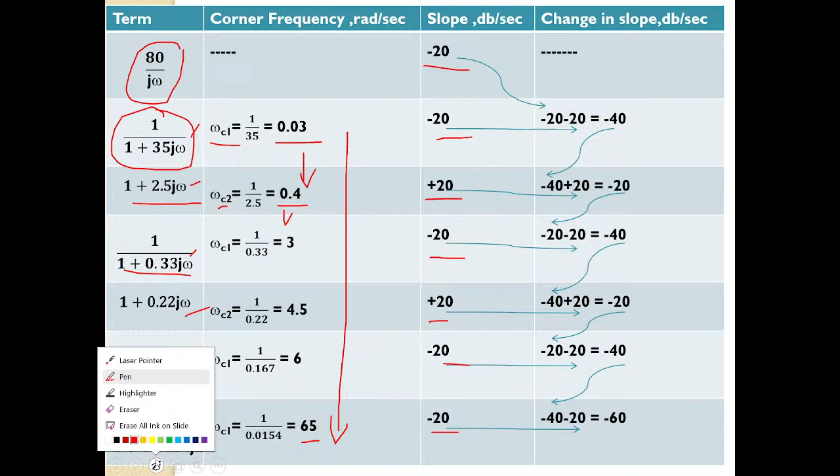After that, as I have already explained in the beginning of this numerical problem, there is a change in slopes. Write down the slope of the first factor in the next row and add it with the slope of that particular factor. You will get minus 20, minus 20, making minus 40. Send minus 40 here, added with plus 20, minus 40 plus 20, you will get minus 20. Send this minus 20 here, minus 20 plus minus 20, you will get minus 40. Send this minus 40 here and add it with plus 20, you will get minus 20. Send this minus 20 here, add it with minus 20, you will get minus 40. Send minus 40 here, add it with minus 20, you will get minus 60.

So these are all the changes, the change in slope values. These are the change in slope values.

So you can write it down later. It's already late, no need to write now. Just look at this, I will try to conclude as quickly as possible.

Now let us choose lower frequency and higher frequency. Our least corner frequency was omega C1, highest corner frequency was omega C6. Least corner frequency is 0.03, highest corner frequency was 65. So omega L should be less than 0.03. I have chosen low frequency omega L as 0.01. Highest frequency I have chosen 80.

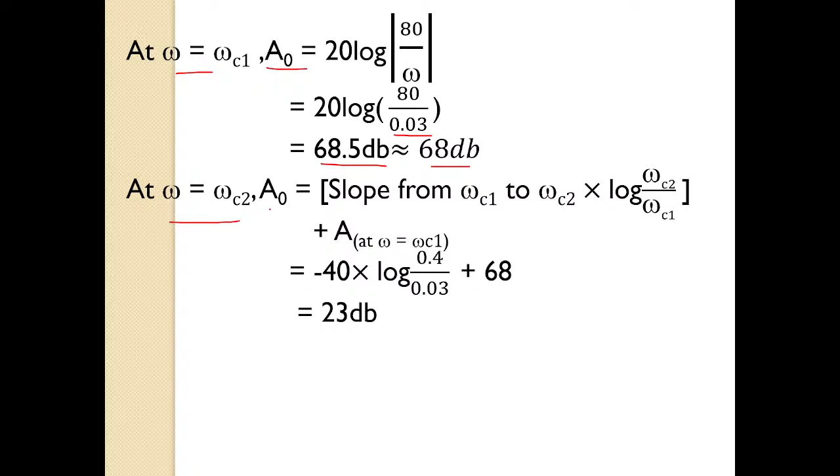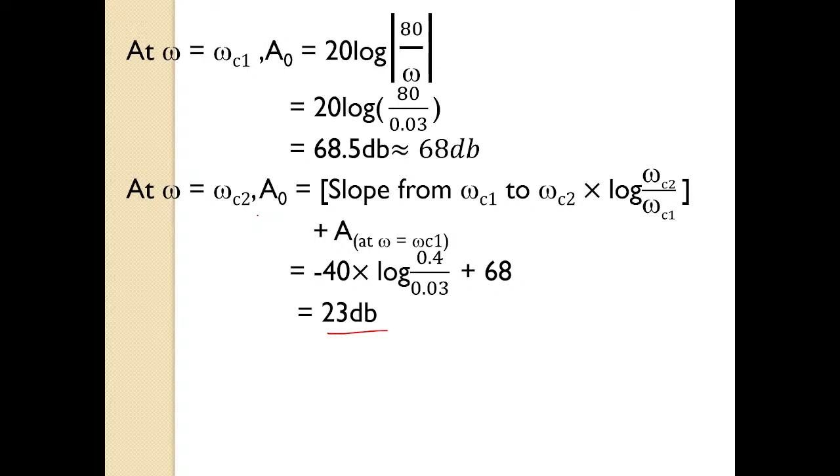Now consider omega equal to omega C2. A naught is, since after the first corner frequency the formula will change - this omega C1 is the first corner frequency, after that the formula changes. A naught equals slope from omega C1 to C2 into log of omega C2 by C1, plus A at omega equal to omega C1. Just substitute all the values, A naught you will get 23 decibels.

Similarly, for omega equal to omega C3, A naught equals slope from omega C2 to omega C3 into log of omega C3 by omega C2, plus A at omega equal to omega C2. Substitute all the values, you will get A naught equal to 5 decibels.

Similarly, for omega equal to omega C4, A naught is minus 2 decibels. Similarly, for omega equal to omega C5, A naught is minus 4 decibels. Same formula, I will not repeat it again and again. For omega equal to omega C6, A naught value is minus 45 decibels.

Next, for omega equal to omega H, A naught is minus 50 decibels. So now you can plot the graph.

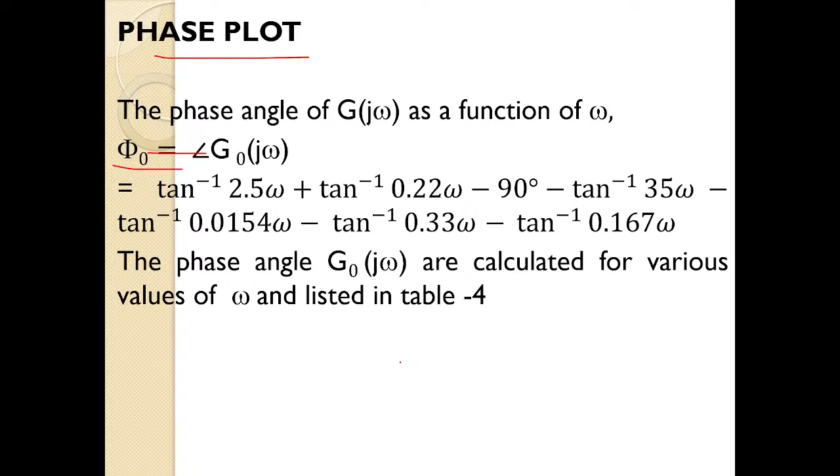So similarly, let us go to the phase plot. Phi naught, you will get tan inverse of 2.5 omega plus tan inverse of 0.22 omega minus 90, minus tan inverse of 35 omega, minus tan inverse of 0.0154 omega, minus tan inverse of 0.33 omega, minus tan inverse of 0.167 omega. Directly you can write it down from the sinusoidal transfer function.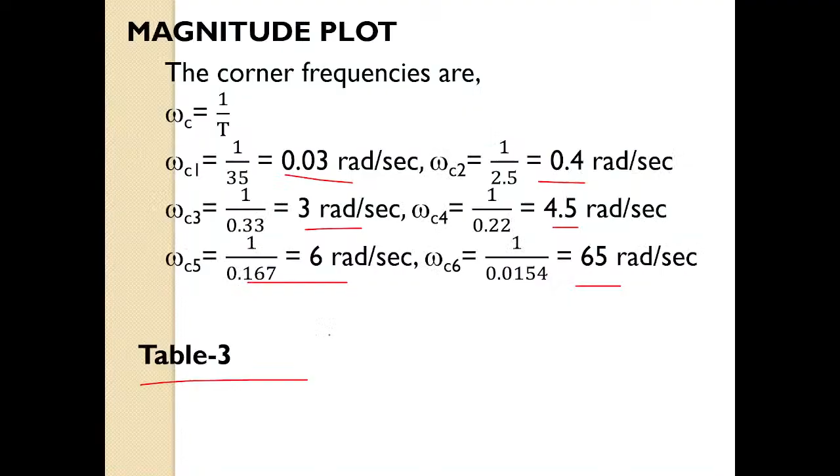You can directly write it down. If you want, I can show you the sinusoidal transfer function, and from that I can tell you how to write it down. So this is it, see here: tan inverse of 2.5 omega, tan inverse of 0.22 omega, minus tan inverse of the integral factor minus 90 degrees, minus tan inverse of 35, minus tan inverse of 0.015 omega, minus tan inverse of 0.33 omega, minus tan inverse of 0.167 omega. So whichever factors are there in the denominator,

for them, tan inverse of the t values - actually it is not t, it is b by a. This value 0.33 by 1 you should write. Whichever terms are in the numerator, 2.5 by 1, 0.22 by 1 you should write. For the integral factor, the angle is minus 90 degrees. So that's it, that's what I have written here - angles.

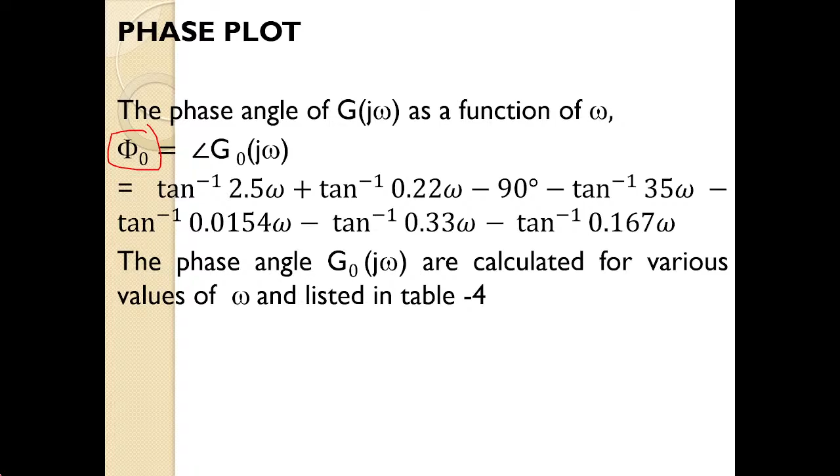You can compare it with the sinusoidal transfer function. These are the angles. So now for different omega values, you can determine phi naught. Okay, so this is my table.

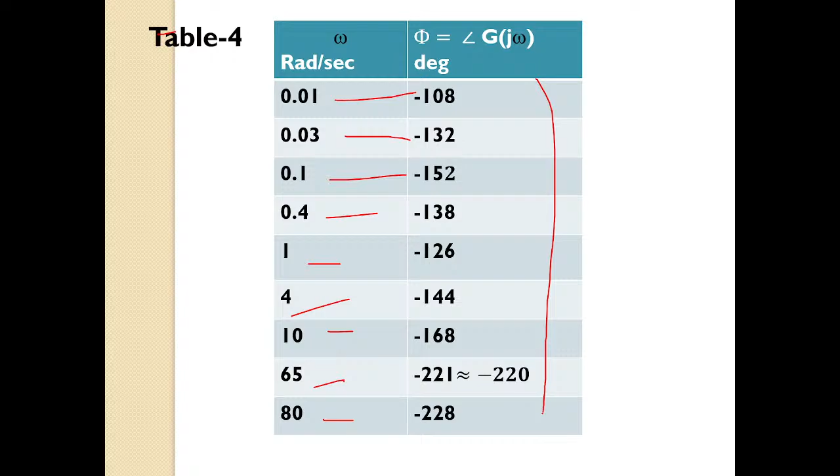For omega 0.01, this is phi. For 0.03, for 0.1, 0.4, 4, 10, 65, and 80. These are my angles, phi values for different omega values. So I have got this. These are the phi values.

So you can do it, as it is similar to uncompensated system. Just I'm about to conclude within 1 or 2 minutes. I will complete this.

So now let us consider phi GC naught is the phase of G naught of j omega at gain crossover frequency, omega GC naught. I have not written here omega GC naught. Okay, so phi GC naught is the phase of G naught of j omega at omega GC naught, and let us assume gamma naught is the phase margin of compensated system.

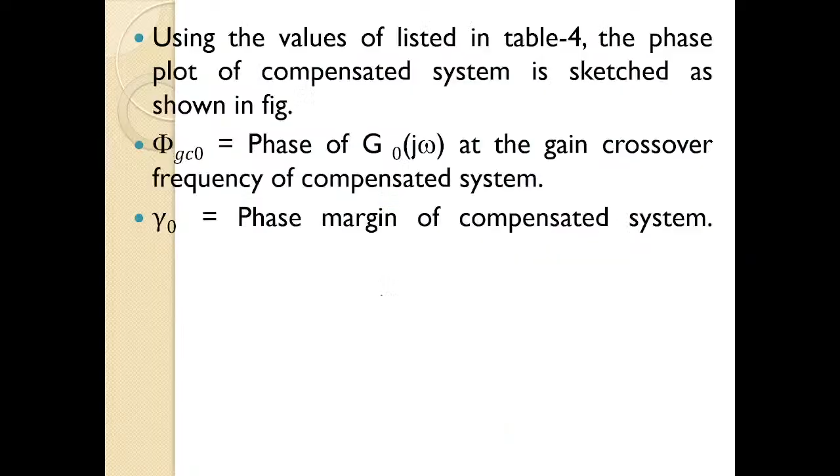So how much phi GC naught did I get? Minus 144 degrees. So omega GC is always obtained at where? It is always obtained at A equal to 0 decibels. When A is 0 decibels, you'll get the omega GC value.

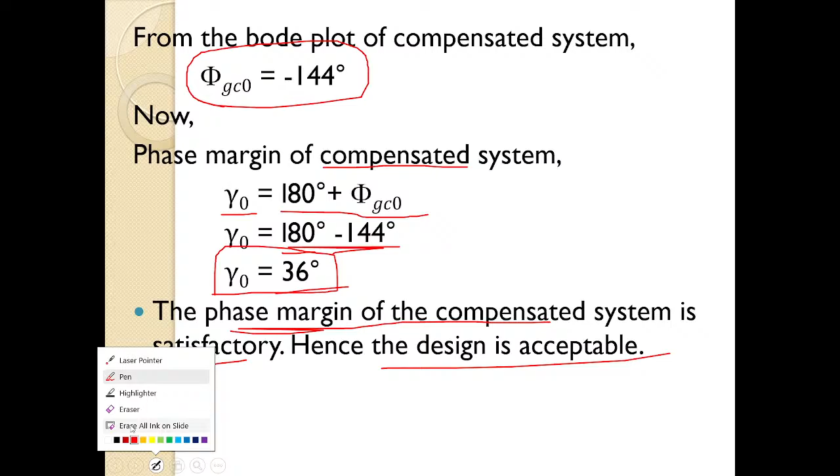So phase margin of compensated system is 36 degrees. In our question, they have told us this phase margin should be greater than or equal to 35 degrees. So 36 degrees is greater than 35 degrees. Therefore, this phase margin is satisfactory, hence this design is acceptable.